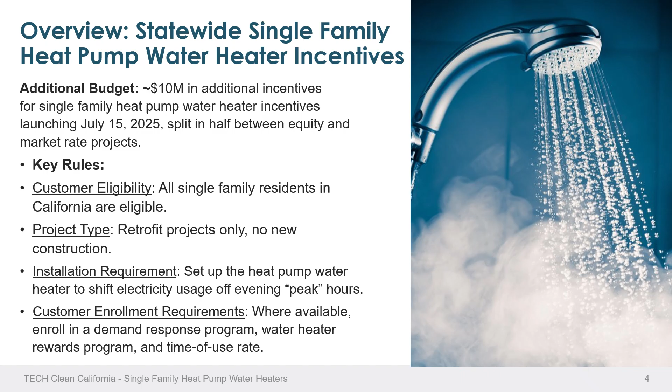Here are the incentives. There's quite a bit to see here, so feel free to pause to take a closer look. One thing to note is that incentives can stack or layer with other heat pump water heater incentive programs. The total incentives from Tech plus other programs are capped at the total project cost. Applicants will need to note on the claim form the total amount of other incentives contributing to the project.

You'll notice that for each single-family incentive, there are 3 rows. Market rate incentives are geographically determined, having unique incentive rates for Northern California and Southern California. These regions are determined by the electric utility provider and will be highlighted in a few slides. Equity incentives are available statewide. You can also reference our knowledge base article to learn a little bit more.

Let's look at the first column as the base incentive level. Incentives start at $1,100. The additional columns are further incentive amounts that a project can earn if the heat pump water heater uses a low global warming potential refrigerant, or if the tank size is 55 gallons or larger.

Here's a few general reminders about the incentives. Contractors are required to pass the full incentive amount to the customer. There's a maximum of 2 units per household. Incentives are available for all replacement types except heat pump to heat pump conversions.

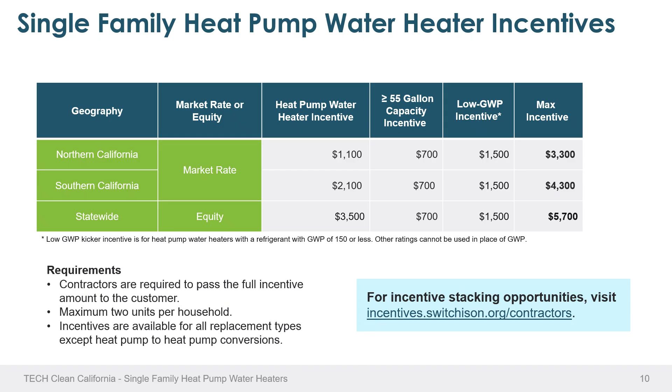Please note that there are opportunities to stack additional incentives with the Tech Clean California incentives. To find additional incentives, visit incentives.switchison.org/contractors.

The amount that the customer receives will be determined by whether they receive their electricity from a Northern California utility, north of the PG&E and SCE division, or a Southern California utility, south of the PG&E/SCE division. Contractors can view the breakdown of utilities by NorCal versus SoCal on the Tech Clean California Contractor Knowledge Base article, Heat Pump Water Heater Incentives - Single Family.

To find available incentives for a customer, you can search their zip code utilizing the SwitchIsOn Incentive Finder tool at incentives.switchison.org.

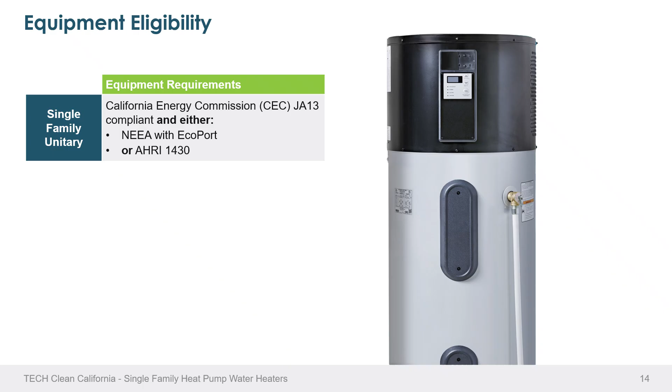Heat pump water heater equipment and installation requirements. Here's a quick overview of the equipment requirements. Feel free to pause on this slide, and you can also reference the qualifying equipment articles on the knowledge base article, as well as the qualified products list on the incentive resources page of the Tech Contractor Knowledge Hub. Please note that while most units on the market are eligible, there are additional equipment requirements as compared to the first round of Tech incentives.

An installation requirement we'd like to point out is the requirement of thermostatic mixing valves (TMVs). TMVs are required on all installations and must be properly installed and calibrated. Thermostatic mixing valves must conform to the ASSE 1017 standard, and built-in thermostatic mixing valves may conform to any of the standards shown on the slide.

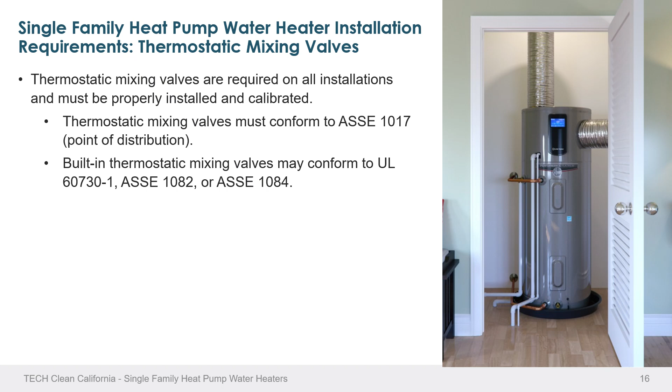Let's not forget about the optimization requirement, which is separate from customer enrollment: the TOU schedule optimization. Contractors must set the heat pump water heater up to shift load, or electricity usage, off of peak hours. Contractors are required to set the heat pump water heater to follow time-of-use rates, meaning it will prioritize heating during the middle of the day and minimize electricity usage during peak hours.

For heat pump water heaters on the qualified products list for these type of projects, setting this up is simple—it's just a few clicks on the manufacturer phone app. For these projects, we'll need applicants to upload a photo or screenshot from the manufacturer app confirming successful setup when submitting the incentive claim. For more information on how to set up these schedules, including manufacturer-specific instructions and guidance on the correct screenshot to capture, please reference the heat pump water heater time of use rate scheduling article on the Tech Contractor Knowledge Base.

Please note that TOU rate schedules are designed by the heat pump water heater manufacturer to reduce electricity bills based on a TOU rate schedule. This is expected to benefit the majority of customers. However, some customers may have different priorities such as optimizing solar self-consumption, shifting even more electricity usage out of peak hours, or avoiding noise during sleeping hours.

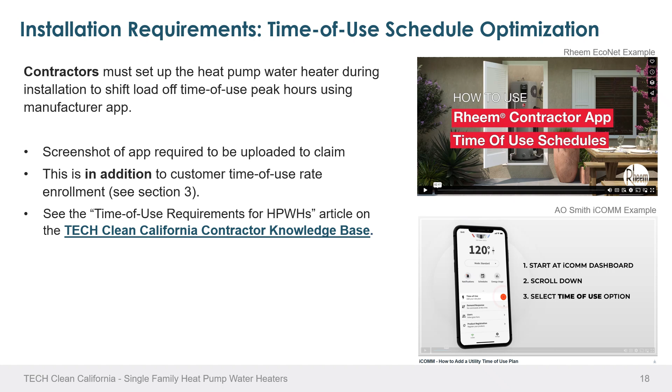If this is the case, you can demonstrate to the customer how to set up their own schedule that meets their needs and still minimizes energy usage during time of use peak hours. You will need to reach out to the program team to describe the circumstance and request approval to submit that custom schedule instead of the default TOU rate schedule.

Now it's time to learn about the scheduling and enrollment requirements that we mentioned at the beginning of this training. We know that a lot of this is new, but it will all help customers reduce their electricity bills and contribute to additional societal benefits.

First, what do the new requirements mean and why are they important? During the evening or peak hours, there is more electricity demand on the grid compared to the middle of the day when solar and clean energy are more abundant. This makes it harder for California to provide enough clean energy to meet that evening demand for electricity and can put strain on the grid when demand is the highest.

So in order to continue to electrify and also make California's electricity supply cleaner with more renewable resources and more reliable, we have to shift some of the electricity demand out of the evening hours and into the daytime.

Heat pump water heaters have the special ability to act like a battery with their large tanks of hot water and shift electricity usage from the evening to the daytime. They can be optimized to heat up to their full temperature during the middle of the day, which means they can reduce energy during evening peak hours, only using electricity if needed. Customers still have hot water whenever they need it, so there's no comfort impact.

What are the new requirements, and how do they help customers and the electric grid? Time of use rates are electric rate plans with prices that vary based on the time of day and the season. They include off-peak hours with lower prices and peak hours with higher prices. In California, off-peak hours are during the daytime, with peak hours most commonly between 4 to 9 p.m.

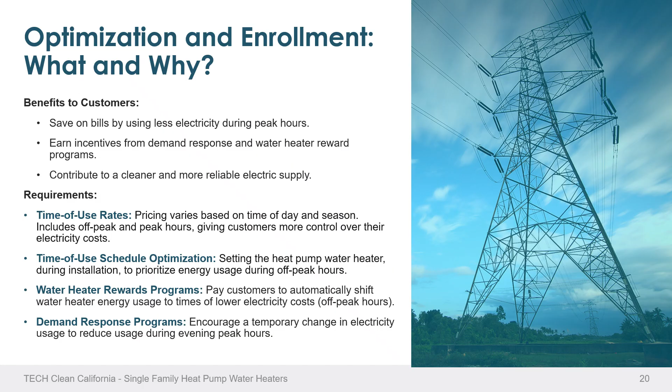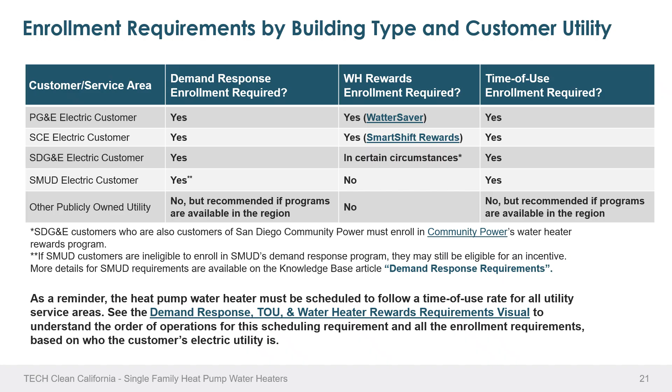However, unlike in the electric IOU territories, there are no demand response programs open to 100% of SMUD customers. If a customer is not able to enroll in My Energy Optimizer, SMUD's demand response program option, they may still receive an incentive. Please see the SMUD demand response eligibility process flow for My Energy Optimizer, a visual on the demand response program requirements knowledge base, for further details.

What are the roles of the customer and contractor? As a quick reminder, the customer is the utility account holder. For all the enrollment requirements—time of use, demand response, and water heater rewards—the customer will specifically agree to the requirements by checking boxes on the tech program terms and conditions, which they will need to sign.

If the customer doesn't have an eligible TOU rate, DR program, or heat pump water heater rewards program in their area, as listed on our website, then the enrollment requirements do not apply to them. The terms and conditions contain links and QR codes to pages about TOU, demand response, and water heater rewards programs for customers to learn more information, find answers to frequently asked questions, and review their enrollment options.

Contractors will need to confirm that all the necessary boxes on the terms and conditions are checked and that there are no missing signatures or information, or else the incentive cannot be paid.

For the demand response program enrollment, all customers must actively enroll in a qualifying demand response program. We cannot facilitate this on the back end for them. Customers will have the option to enroll in any qualifying demand response program of their choice, as discussed on the previous slide, and there are many options.

Enrollment can take as little as 3 minutes. Customers will likely be unfamiliar with the concept of demand response, and contractors are encouraged to familiarize themselves with demand response and the program options so they can help customers through the enrollment process.

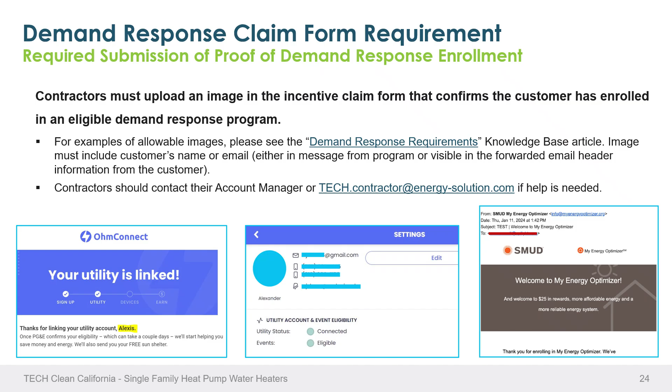Heat pump water heater documentation requirements.

Here are the documentation requirements for heat pump water heater claims. Specifically, let's take a look at the photos first.

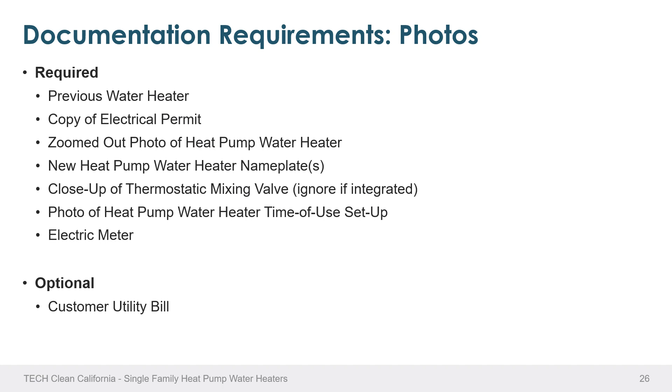Shown on screen first are the required photos: a previous water heater photo, a copy of the electrical permit, a zoomed-out photo of the heat pump water heater, the new heat pump water heater nameplate, a close-up of the thermostatic mixing valve (ignore that if it's integrated), a photo of the heat pump water heater time of use setup, and the electric meter. It's also recommended, but not required, to upload the customer utility bill as well.

Another document required for the claim form is the customer invoice, the invoice for the project shared between the contractor and customer. This document should include the invoice date, which must be on or after launch date, the customer name, project address, the tech incentive name and the full amount, any additional anticipated incentives and discounts, equipment details including the quantity, all related project costs, and the amount entered in IRIS should be total costs prior to the internal or external incentives and discounts being removed.

Next, let's take a look at the documentation called the Terms and Conditions, also known as the T's and C's. The T's and C's require the customer name, customer address, customer signature, an account holder signature, an attestation of the demand response and water heater rewards program enrollment, the selection of the time of use rate to enroll, the electric utility and account number, the date, which must be on or after launch date, and the document must be fully completed or the reservation and/or the claim will be rejected.

Please ensure that the required boxes are checked, and the information must match what you type into IRIS. Please reference the knowledge base article, Customer Terms and Conditions and Invoice Requirements, on our knowledge base for more information about allowable signature dates.

The reservation process for single-family heat pump water heater claims. As a first step, to create a new reservation, on the main dashboard of IRIS, click the button New Pre-Approval located at the top right of the screen. From there, you'll be asked to provide the required information and documentation. This is the information that was highlighted on a previous slide.

Once all information has been inputted into the pre-approval, you'll submit the reservation. From there, a pre-approval object will be created for the entire project, and a funder request will be created within that object for all programs this project might be eligible for.

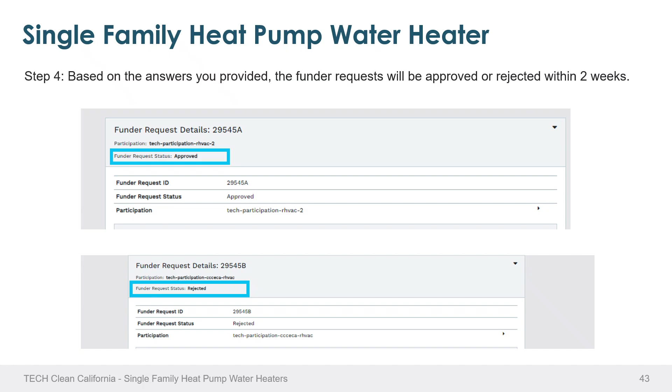Next, based on the answers you provided, the funder request will be approved or rejected within 2 weeks. Once all the funder requests for your reservation have been approved or rejected, you are approved to move forward with your project and can turn your reservation into a claim by pressing the Start a Claim for this pre-approval button. If the customer information changes between an approved reservation and a submitted claim, it may be subject to rejection.

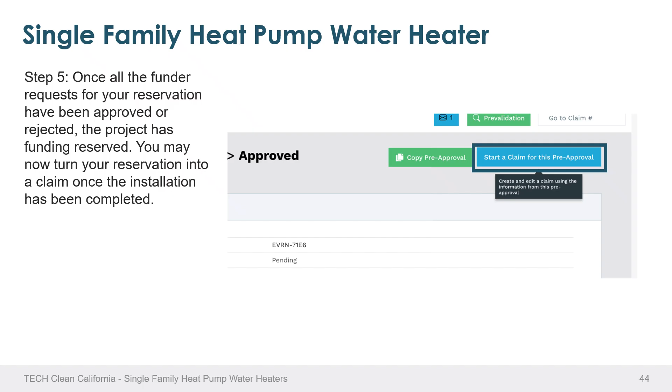When funding is nearly reserved, we announce via email the last day to sell and reserve jobs. Funding is first come, first served. Anything created is not guaranteed to be funded until budget impact is clear.

In this next section, we'll showcase some of the key heat pump water heater claim form fields that you may not be used to collecting. Be sure to review the entire claim field list before installing a project. To find that, navigate to the contractor knowledge base to access an Excel document that showcases all of the field requirements.

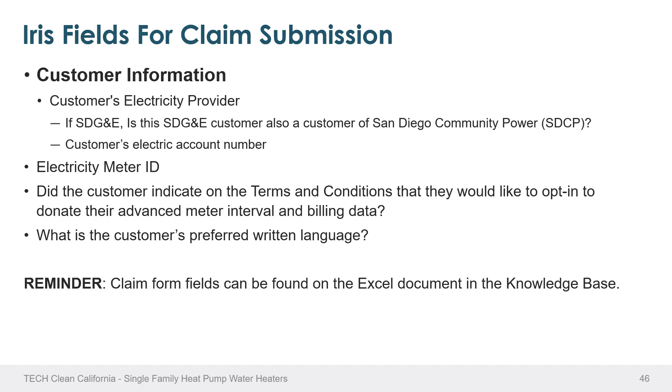First, let's take a look at some customer information. We'll ask the customer's electricity provider, including if it's SDG&E, is this SDG&E customer also a customer of San Diego Community Power? We'll also ask the customer's electric account number, the electric meter ID. Did the customer indicate on the terms and conditions that they would like to opt in to donate their advanced meter interval billing data? And then, what is the customer's preferred written language?

Next, taking a look at site information, we'll ask the number of bedrooms served by the installed heat pump water heater, the number of bathrooms served by the installed heat pump water heater, and was solar PV present at the house before the heat pump installation.

For project information, we'll ask for those customer terms and conditions sign date, the signed T's and C's themselves, and other electric technologies on site were installed as part of this project.

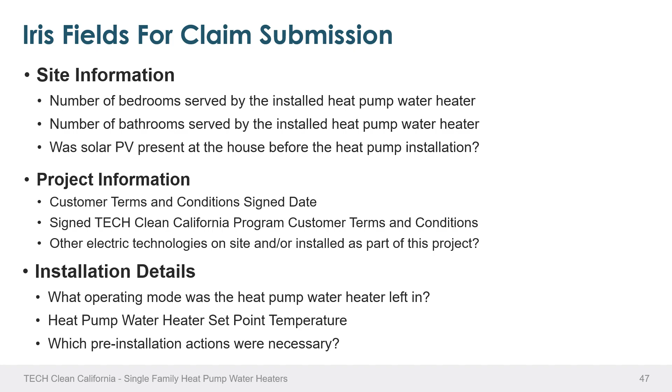For installation details, we'll ask what operating mode was the heat pump water heater left in, the heat pump water heater set point temperature, and which pre-installation actions were necessary.

On the topic of demand response and time of use, we'll ask, did the installer set the heat pump water heater to follow time of use rate? Was a universal communication module add-on unit installed? Did the customer enroll in a demand response program, including some follow-up questions? Customer's demand response enrollment confirmation.

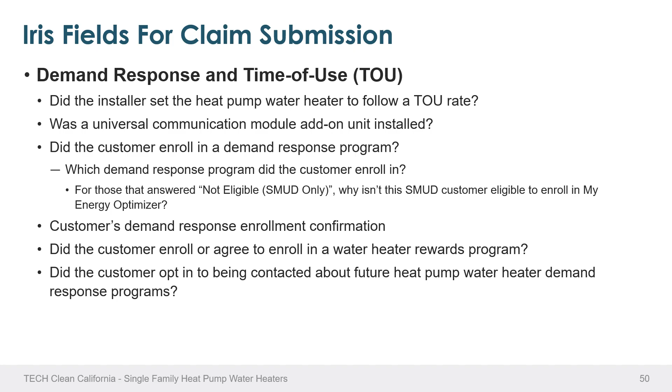Did the customer enroll or agree to enroll in a water heater rewards program? And finally, did the customer opt in to being contacted about future heat pump water heater demand response programs?

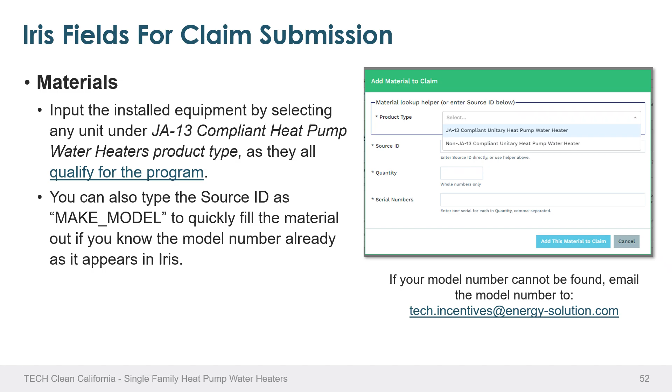In the materials section within Iris, you'll be asked to input the installed equipment by selecting any unit under the JA-13 compliant heat pump water heater product type, as they all will qualify for the program. You can also type the source ID as make_model to quickly fill the material out if you know the model number already as it appears in Iris.

Next, in terms of photos that must be uploaded, we ask for the previous water heater, which must include the equipment nameplate, a zoomed out photo of the heat pump water heater, which must show the capped gas line, insulated hot and cold lines, the earthquake strap, the temperature pressure release valve, the condensate drain, and the termination point, a new heat pump water heater nameplate, including the model and serial numbers which must be legible, a close-up of the thermostatic mixing valve, and please note that this is not needed if the TMV is integrated into the heat pump water heater.

A photo of the heat pump water heater time of use setup, and you must provide a screenshot from the manufacturer app. See the time of use setup info for heat pump water heaters knowledge base article for more information and instructions. And finally, the electric meter, showing the one that the heat pump water heater is on. The meter ID must be legible and must match the meter ID entered in the claim form.

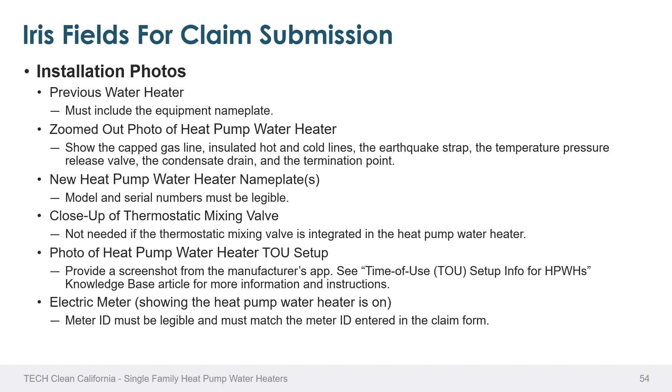A few last fields that we like to point out are for the additional incentives and attestation sections. First, in the additional incentives section, we'll ask to please select the name of any other incentive programs being applied for and what the total amount of other incentives applied for is. Finally, in the attestation section, we'll ask the contractor to attest that by submitting this form, I affirm that the installers for this project completed the required installer training for TECH Clean California heat pump water heater incentives.

Lastly, we want to point out a few common mistakes to avoid to ensure that your claim gets approved as fast as possible. Ensure that the terms and conditions are completely filled out, signed, and dated, and match what you enter in IRIS manually. Provide the correct customer account number. Provide clear photos. Include the correct TECH Clean California incentive in the customer invoice.

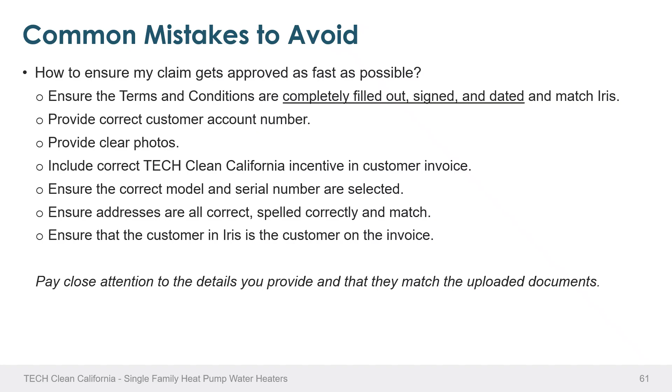Ensure the correct model and serial number are selected. Ensure addresses are all correct, spelled correctly, and match. And finally, ensure that the customer in IRIS is the customer on the invoice. Pay close attention to the details you provide, as they must match the uploaded documents.